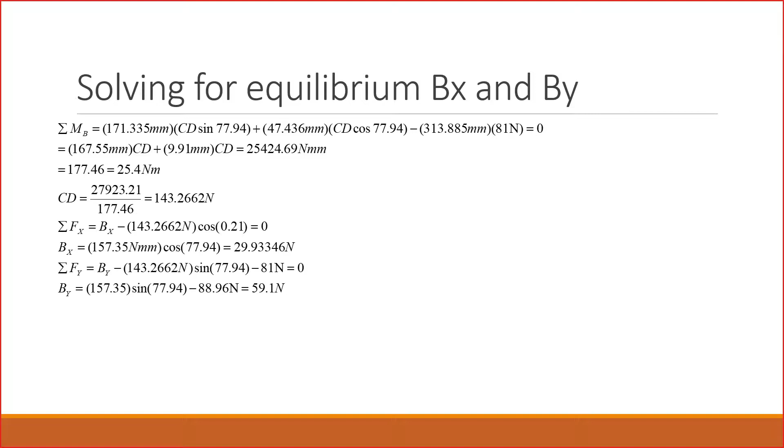So what I did just to build it up is I solved everything by equation to find equilibrium of where everything sits. Now I have provided these in the notes. I've just realised, there we go. I have provided these in the notes, and what I've then done is collated these into a table of results.

So within this table of results, what we're aiming to do is look for these calculated outputs and see if we're getting something similar to what's been provided by CD, for example. So in CD, you can see there—oh, you can't see there, that's very awkward. So let's look at BY and BX.

Now we can test for BY and BX just to see what level of force is there, because we've got the joint—that will pull out forces for us. There's many different ways we can do it, but these are key things that we can look for.

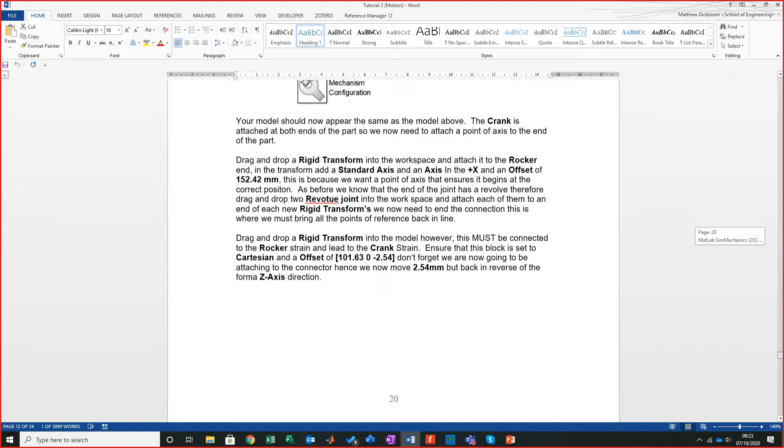And into second generation, so this is the second generation one. I'm going to work my way through this right now, but I'd like you guys to be aware of what it is that we're doing and what we're aiming to actually get out of all this. So what I'm going to do is just minimize the notes. I've also downloaded my bar linkage.

Now we need to tell Matlab that we're going to use a particular folder. So on my desktop I'm going to right click, then go new, and I'm just going to add bar linkage as a file tab. So under there I'm going to double click in, and this is now going to be my working folder. I need to keep this in mind.

I'm just going to close off all my Internet Explorer because I want to take you through the process of unzipping particular things. These are all my notes, so in downloads I've got bar linkage there. Now I put it in a zip because there is an automatic unzip profile built into Windows.

I do like to use 7-zip, it's a high compressor, it's really good. So what I'll do is double click into it, and then what I've got is the connector, the crank, the frame and the rocker.

And what I'm going to do is highlight them all. Do not think that you can double click that in and that's an accessible file, because that's you sitting inside of that compressed file. What we need to do is go into it and then drag across. I left click, drag and drop, and all that'll do is take a copy of what's in that folder and make it an accessible folder.

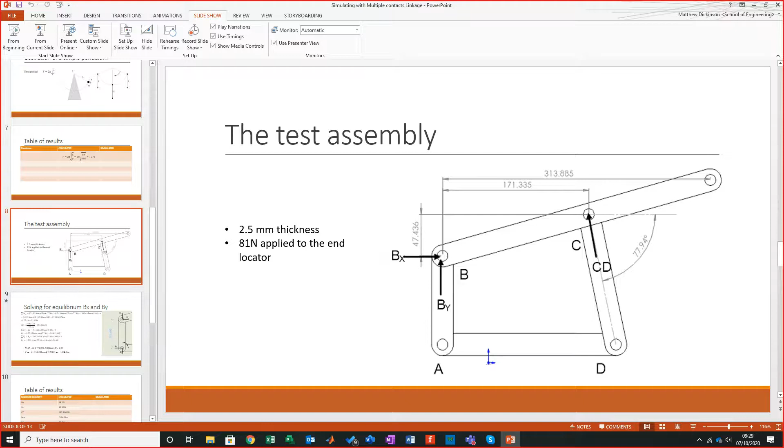One of the first things we always need to do is set up the key active components. In this case, it's the world. Wait a second, so I've just gone to library. I'm going to minimize there, and I'm going to drop my Simscape multibody, and these are the key points now that I'm going to be looking for.

So I'm going to go utilities. From utilities, I need a solver configuration. Don't forget the solver configuration allows me to modify the inputs. I can choose relative tolerances from what I'm getting. I'm presuming that Matlab know what they're doing in this case, so I'm not really modifying it. I just want it to be there to allow that solver configuration if changes need to occur.

I'm going to go utilities. I'm going to drag and drop a mechanism configuration. Finally, I need that all-important datum, the world datum, a starting point.

This is where our 0,0 marker will be, our 0 point for the components. Again, I always call it a datum because quite a few will be CAD savvy, so I call it a datum in this case. We've got frames and transforms. I'm going to bring in a world frame. So this is now my world. Just sounds silly to say.

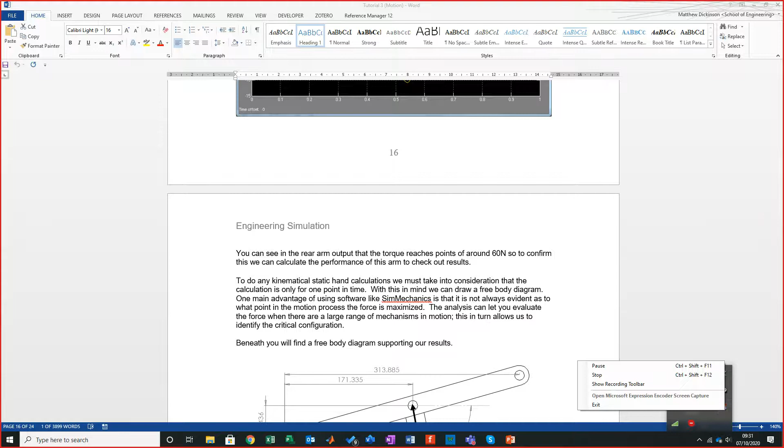Is this session recording, is it? Yeah, because normally you see a red border. Yep, this session's recording. Oh, do you normally see that red border on that? Yeah, I didn't realise you guys saw the red border, but the red border is here. Normally you see a little red button as well, in the corner, it just says it's recording. Just letting you know. Ah, hang on. Yeah, you mean from other lectures? Yeah. Yeah, I don't use Stream.

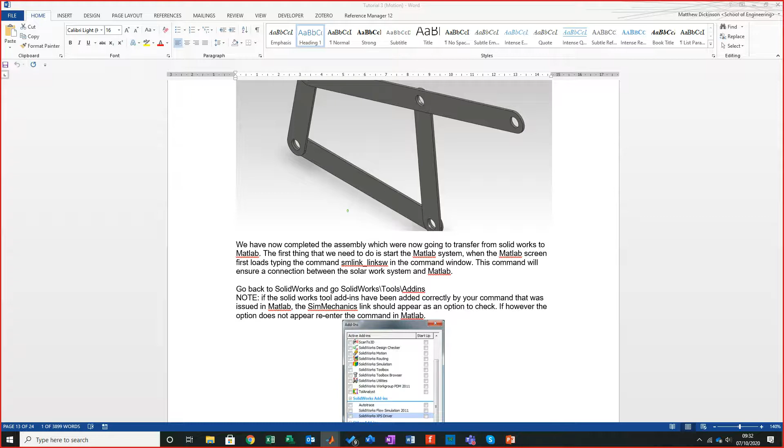So Microsoft Stream is an online method for recording, and if your internet signal goes a bit dodgy, it will record your screen going dodgy. So what I use is an on-screen mechanism called Microsoft Expression. What Microsoft Expression does is it records the screen to my hard drive, and then I upload the file. So if my signal goes bad, the video will be extremely consistent. That's the only reason I do it.

Right, so what was I looking for? Oh yes, right. So if I just bring it back up, right there. So we've got a baseline. We have a frame, we have the crank, we have the rocker, and we have the connector. What I've always approached with this first is the actual fixed points.

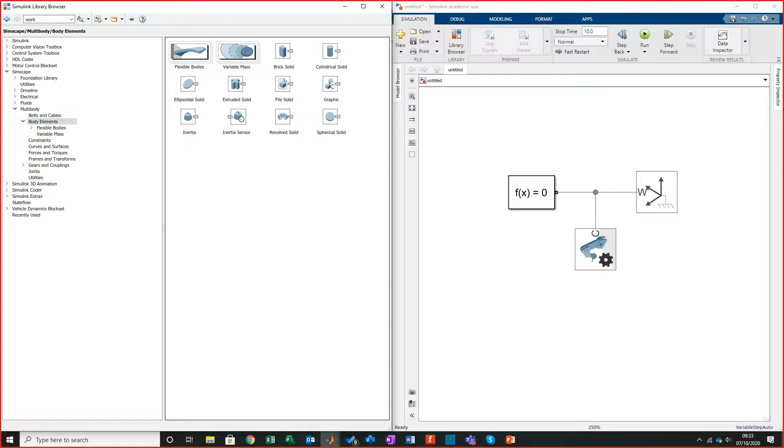So I'm going to go with the frame. If I come down, come in, and what I'll do is, first things first, I'm going to go to body, because the thing is, the frame in this example does not move at all. So what I'm going to do is say file solid, drag that over, I'm going to rename that and call that frame.

Then I'm going to rotate it, bring that up into place, and bring that down. And then all I'll do is connect the frame in.

Now we're going to add to this, but the thing is because the frame is fixed, there's nothing it does. So all I'll do is come in, and what the system does now is it says cannot make a visualization because there's nothing there. As ever, there isn't anything there.

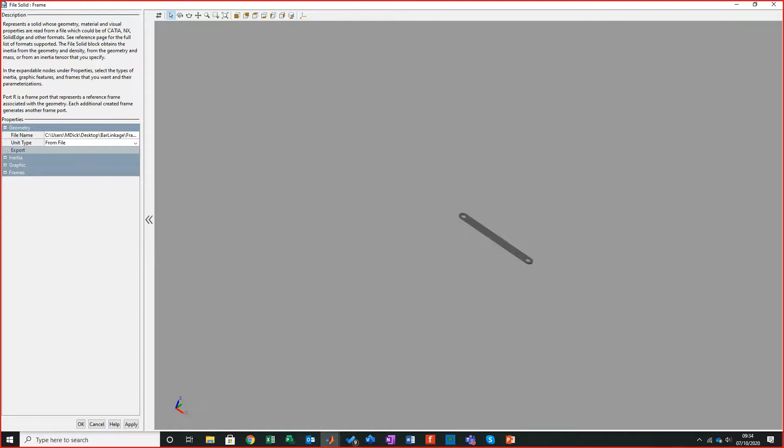What we're going to do is come down, and I'm going to go to my folder and go frame, then click open. And if I press F5, what I get now is my base frame component.

Now with my frame component set, this is quite useful. So what we see here, if I just expand this out, what you see is an address. It's on my C drive from the user, and it just tracks to where it is. Now if I move this file somewhere else, the location will change. If it changes, this will crash.

Now by using the live file, when I added the file at the beginning, what that means is I can use the active file. The only way I can do that is if I delete and just have frame.step. What that will do is, as long as I add that file location each time, it means it will always find it automatically. It's just a quicker way of being able to do it. It can be a little bit frustrating otherwise, because you can get caught up with all sorts and it's a pain in the backside.

Right, now the density. What I need is a relative density, and this is far from what I need. So what I'm going to go with is, I think it's a steel, so 7700. Is it steel or aluminium? I always get myself mixed up on that. So I'm going to 7700. This is going to be the same material I'm going to use for the entire thing as I am going through. So this is my output points here, this is my mass, my center, my moments of inertia, and everything's been pre-calculated for me, which is great in this case.

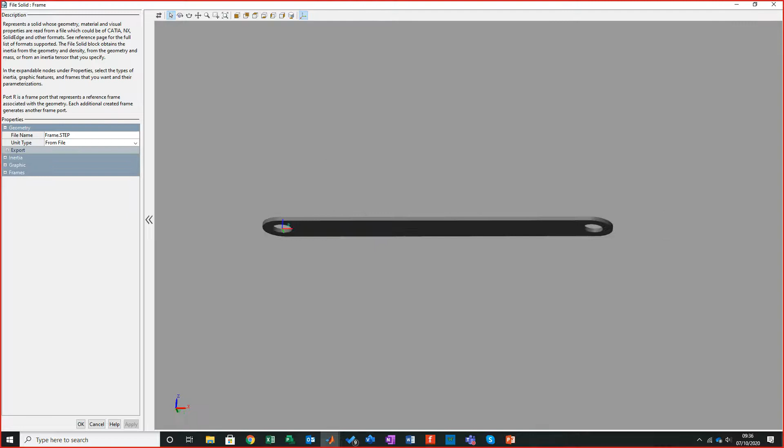Now this is where it's really important. If you zoom into your frame location, it tells you originally how this was drawn. So this was drawn from the datum on the circle and then extruded to give my 2.5mm offset. That's fine. So I give it to the 2.5mm offset, and then I've given that distance across. So what that tells me is if I'm doing any particulars, I need to be aware of these sizes.

So I'm just going to close that, and then I'm going to go into bringing in a rotation. Now this rotation is purely around, I'm calling up these notes as much as possible just to show you. If you look there, it rotates around this way. And what we need to make sure is that there's no collision, so what this will do is push things out. So first things first, let's just add these in and take a look.

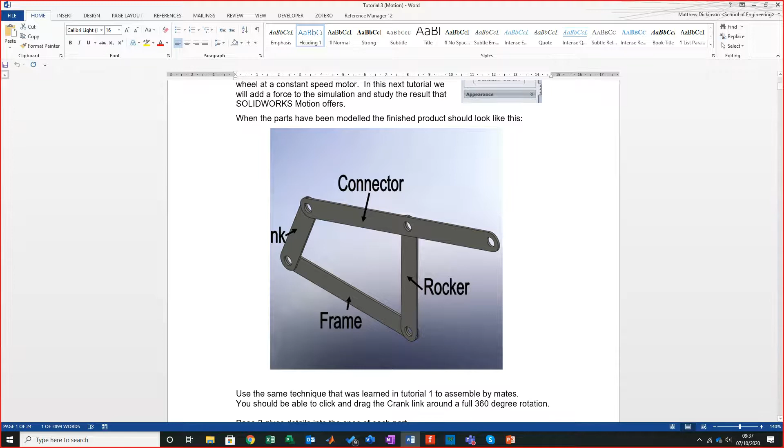Right, so if I'm doing that rotation around, I'm going to go to joints, revolute. Now the revolute, as you'd imagine, is a revolving joint, that's all it is. So I'm just going to bring it up to here, and I'm going to add a revolute joint in. Now, I don't like to waste time with a lot of things, so what I'll do is right-click on here.

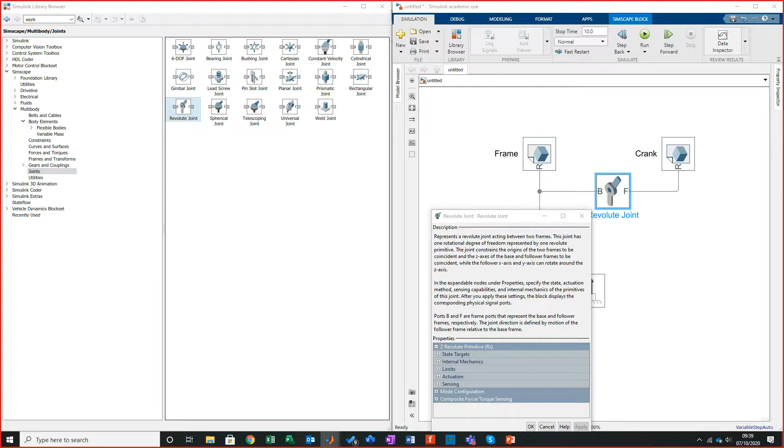So these two are now connected by a revolute. And what I want to do is just make sure that this thing's going to move. So I'm going to set a temporary speed and set it to 60 revs per second - this is an initial moment so it can be moving at that present rate. So from my target state, targets, from specific velocity target, I'm going to go priority, high desired priority, and set this to revolutions per second, and move this now to 60. Then this just sets this in there, and you'll find it matches with the notes as well.

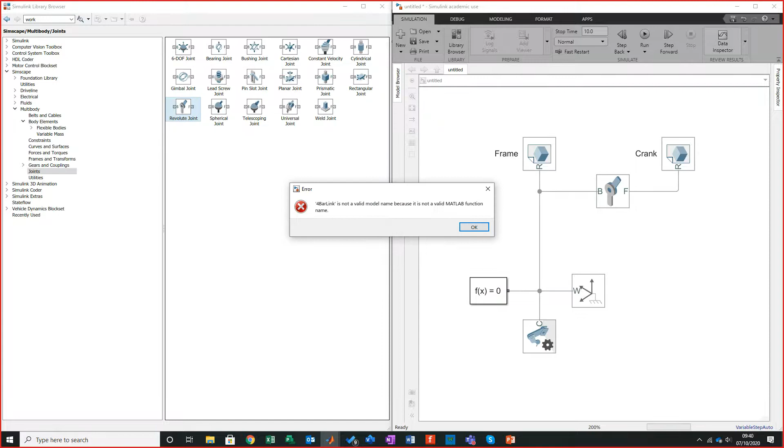If you've not done already, hit save, so I'm going to go save as, and I'll call this bar linkage, or 4 bar link. Save that. Oh, God, Bloody Matlab with its names. I'll just call it bar link.

There we go. So the reason I've done that is we're ready to just see this running. We're ready to start making small steps to be clear about exactly what it is that we're looking at.

Oh, this is a great question. Great question, I just want to pause for this one. I just want to read the start of this as well: this might be a really daft question, but what is a step file from SolidWorks and why do we change it to step? Good question.

So SolidWorks has its own particular way of dealing with translation, like an Inventor file - I think this was in the 80s. In the 80s, a lot of people came along and went, right, we do a CAD system, we do a CAD system, we do a CAD system. And they went, right, we need a universal way that everybody can talk to each other, we're sick of it. What they did then is introduce IGES, the international way of being able to communicate CAD across the files. What they then found is some CAD systems didn't take up the key aspects of this IGES, so when you actually exported it, it didn't capture everything that you'd done.

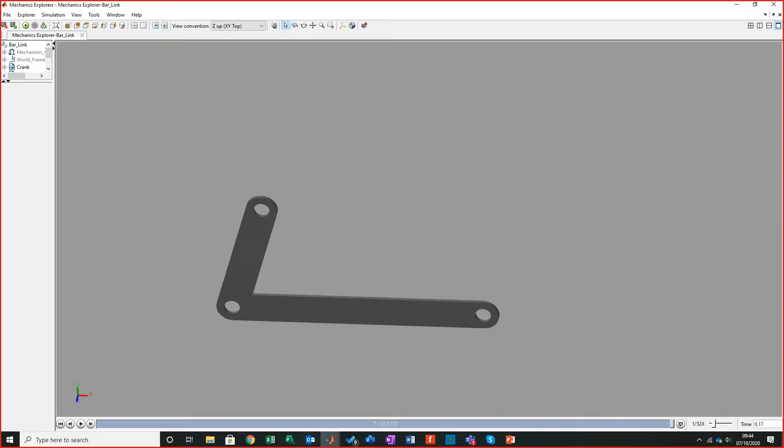Which is great, however, when we spin this up, we've got massive level of penetration. There is collision throughout the entire thing. This is good, it's moving like we wanted to. It is bad, it's in the wrong position, and it's not running like we wanted it to.

So this session today, what I really wanted to focus on is the use of rigid transforms. We did a bit of it last week, not much, just a bit, but we're going to use it quite aggressively today, and it's for that very reason.

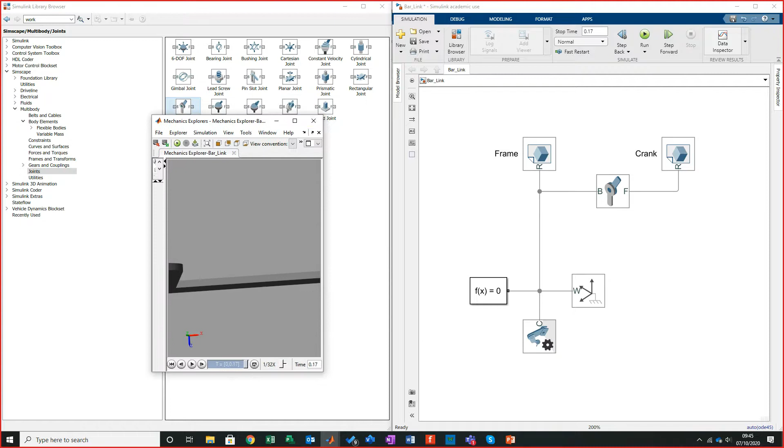So what I'm going to do is leave that open for the minute, I can close it when we're talking about it. What we know is that all-important 2.5mm distance has not been set correctly. What I now need to do is set it, using rigid transforms. Rigid transforms in this case can be set variably.

You can set... Matt, just to stop you. Yeah, go on Dave. You know when you're actually putting your assembly together, how come it didn't pick up that it was colliding with the other part? Ah yeah, good, this is a really good question, because this really does not know.

The thing of the matter is, if I just open these back up and look at this, what you'll see is all it's actually referring to - let me just update that - it's only referring to the physics of the actual component, it doesn't refer to the geometry. It didn't identify two components together, did it? Well it actually did, but it didn't identify them together. What you've actually got to do in this system is tell it that they're going to hit each other.

Okay, so that's when you head down the road of contact mechanics. But it's a phenomenally good question, because in this case, these two are presumed not to be. What this system will do is say, right, I will do whatever you want me to, but if you miss out stuff, I'm still going to produce it and you'll have just done it wrong. And it's clearly that, there are further things to add to this. I do really want to look - well, I'm going to see if we can do this, I do want to look.

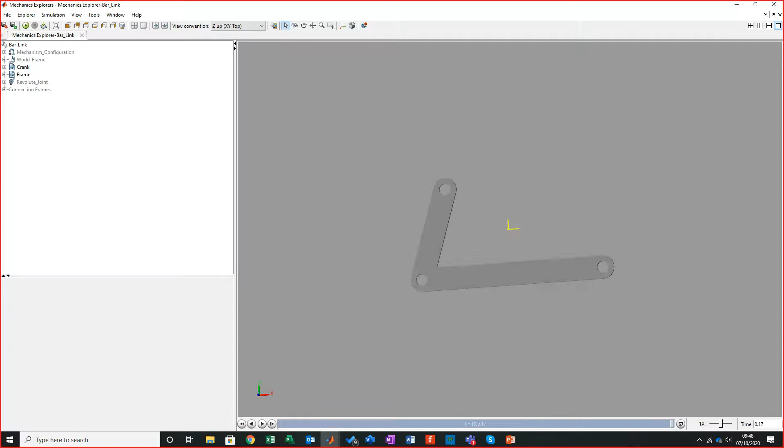Yeah, in this case the issue that we have is that it's just wrong, the way I've done this, it's just wrong. All I can actually do - let's say this has been brought in as a job - all I can do in this case now is work around the geometry and look at how this has been put together, and make sure it's a real representation of what's going on. Then once I've got that running, I can look at incorporating Archard's law to give me how much material has been lost as wear.

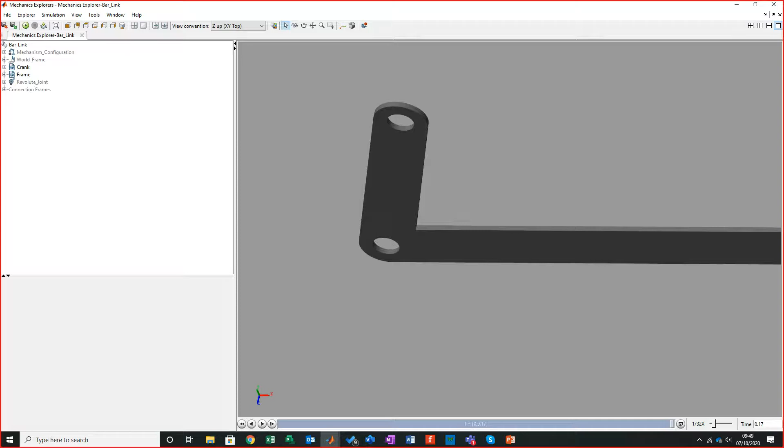Because Archard's law, to do with the two equations as they're running together, to do with the two materials as they're interfacing, I can calculate how much has been lost. And it's a dynamic input as well. But as far as the interfacing goes with the two, then I've got to bring in further things.

So I don't know if I've not got my toolbox on here. I have another toolbox I've been running, which is just contact mechanics. And I'm hoping in these sessions we're going to actually take a look at using contact mechanics. It's all right, it's all right to use. It's just a little bit intimidating sometimes.

Right, so what I need to do is I need to move these two separately. So I'm going to go to my rigid transform, bring in my rigid transform, drag and drop it, and push that into play. Now, the way that this works is the base is where we were originally. The follower is the result of what we're telling it to do. So whatever comprises past this point will be operational. Whatever is former to this point is the former position where we were sitting. So I can rotate this joint.

I can make the crank rotate in all different directions. I can translate the joint where I can say move in a particular area. So I can do standard axes, moving Z, moving X, moving Y. Now for this I'm just going to use Cartesian. Cartesian in this case is simply X, Y and Z. And I know that what's happened is it's not in the right position relative to Z.

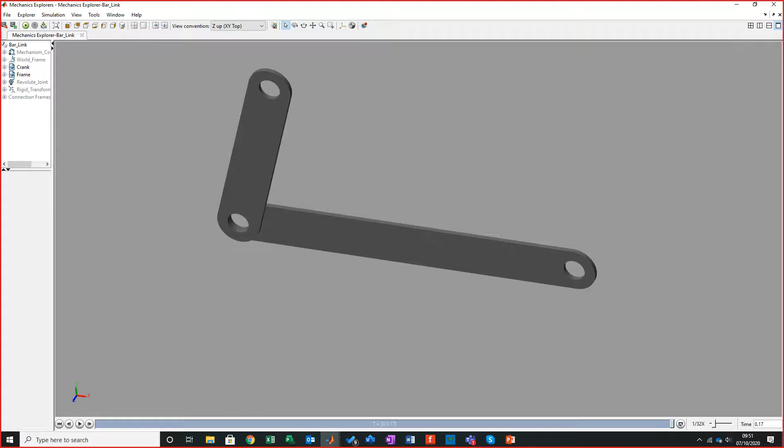I'll probably take this down by a factor of 10 as well. Actually, it's running, I only really need one rotation just to make sure that I'm operating. So I'll take that down by a factor of 10, I think that will give me just one. All I've done is take it to 0.017.

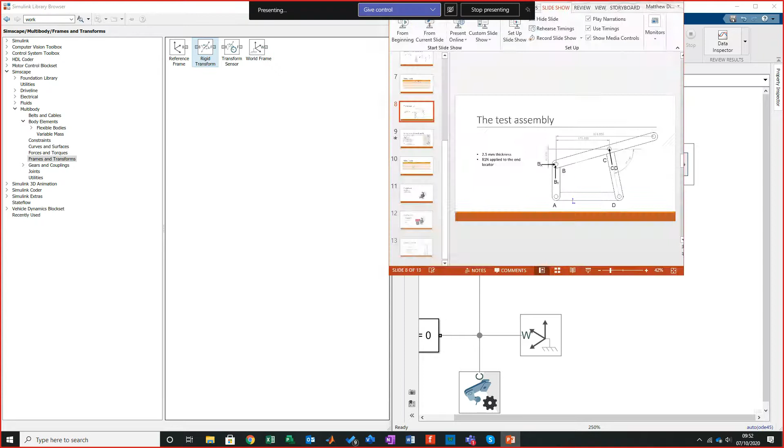Right, and ideally, now what I need to do is the exact same thing with the rocker. Now the rocker is the component to the front of it. The issue with this is again slightly different. The rocker now is at the end. So if I consider this, the rocker sits here, but I need to know what that distance is across from there. Now, again, I do like to just keep panning on these notes just so you can see. So the rocker is 152.4 between there and there.

So if I come back down, I'm going to go to my rigid transform, going to bring in my rigid transform. I'm going to bring in my rigid transform and pan it over here. I'm just going to bring this up a little bit, I just want a little bit more space, and this is now going to be towards my rocker.

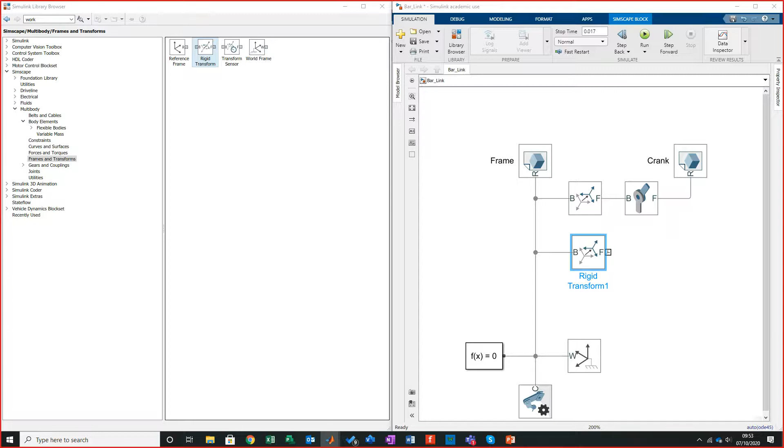Now the beauty is with this is I do know that my first Cartesian value needs to be that 2.54. It will need to be. But also I know that moving along that X component where the frame sits is that 203.2. Is it 200? I've got 203.2 in my notes. Why have I got that? Oh yes, because I was looking at, yes, apologies, yeah, 203.2, not, because that's the rocker. Yeah, it's the frame I'm actually operating to. Get myself confused now.

So what I now know is that in my rigid transform, I'm going to move this connecting point from on here, go to my Cartesian, and I'm going to delete that and go 203.2. We're going 2.54, and I'm just going to delete that out and then apply. Click OK. Now this is the same time.

You're in meters, not millimeters. Oh, thank God, thank you. That would have been very awkward. Yeah, you're right, that is monstrous. So I've gone millimeters, I have done it. I still do that to this day. Never get it right every time.

So what I'm going to do is, now I'm going to copy these, but don't forget this has been actuated, so I need to remove that actuation. So I'm going to highlight that, bring that down, and I am just really being that lazy. Just, if I can, I will do. So spin that round, and I'm just going to call that rocker.

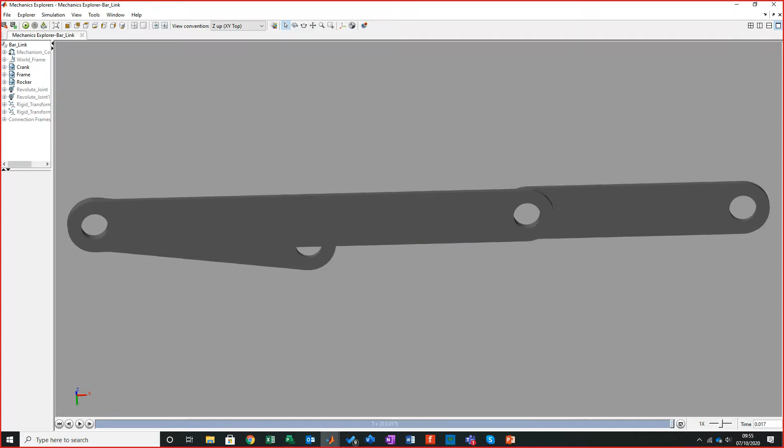Ah, I tell you what I didn't do. See the crank's there, I didn't actually add the rocker. So again, I'll come onto here. Because I'm operating from the active file, I can just type in rocker, click apply, F5.

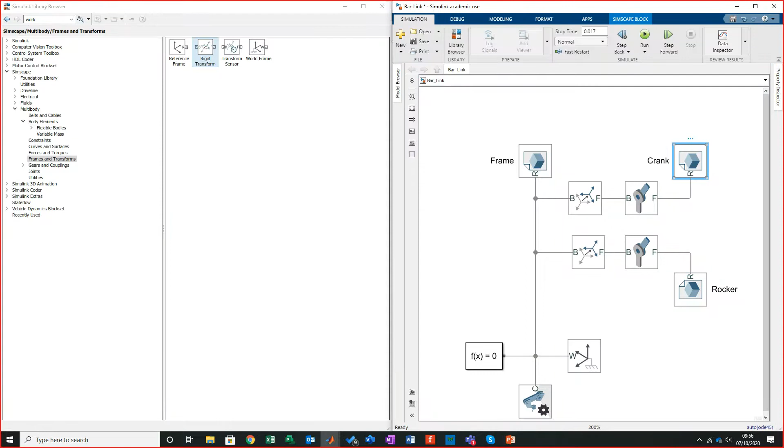Some of you may want to do this. I like to do this to just give me a bit of definition, because I think this comes back to Dave's comment as well, which is a good comment of, you can't really see it clearly. Some of you might be able to, not a problem, but I can't really see that clear definition between them. So all I normally do is go to graphics, and I will genuinely just colour one in a different colour, and it really does help when visualising what's going on. So I'll probably go here as well. I'm probably just going to change that to blue, and I know it seems a little bit over the top, but it is really useful.

I'll probably keep that colour, to be honest, and stay with that red, just for these two sub points, and then the up connector, I'll probably change that to blue.

But what it does is, if I run that, and then when we come back and we come to that - where's my component set now? So that's my X and Y. I'm just looking at the data, so I'm just trying to put it into something a bit more sensible. Right, there we go. So if I run that,

Slow it down a little bit. There's one thing that I've forgotten to do. I'm not trying to say I set it up, because I totally forgot to do it. I don't know if anybody spotted it, but there is one thing I've forgotten to do.

If I run that, this has perfect behaviour around the frictionless joint. If that is the case, why is it not falling? And the truth of it is I've forgotten to put gravity in Y.

So if I just quickly go to my mechanism configuration, drop out my 0 from my Z component, from my Y component, and swap them round, click apply, and now I should be in the gravity, and it should be moving them both. Let's just have a look.

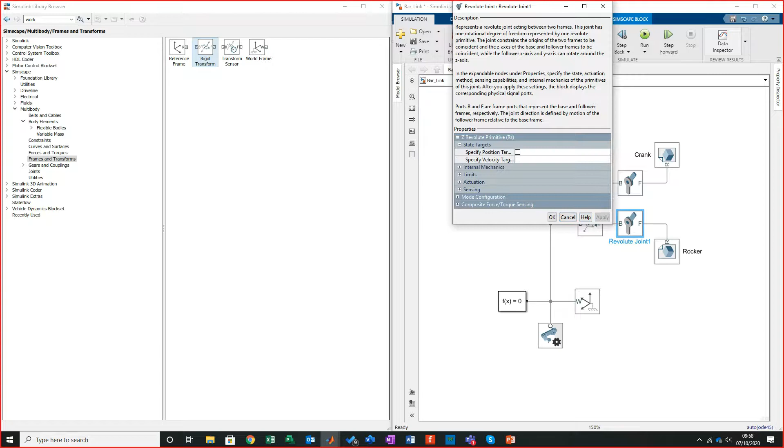I'm going to bring in the next joint because I'm not sure about that one. Looked at that, thought it could have given me more connections between it.

Right, what I'm going to do now is start bringing in the other component sets. Now, if you remember what I was saying on here is, bring that note in, enter there, right. So what I now need to think about is there is a revolute around here and also a revolute here. So all I'm doing is building exactly as this has been made.

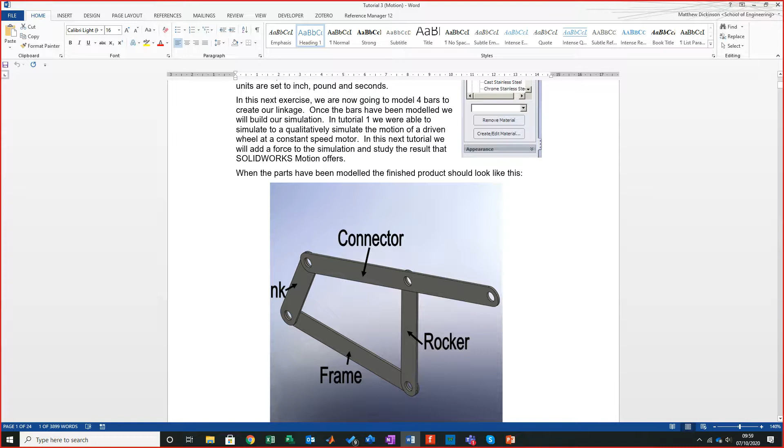Now the other thing about this is if you look at the frame, it goes an offset of 2.5 millimeters. Then it comes up to the connector, also offsets again by 2.5 millimeters. Again, all it's doing is just avoiding the collision. And all I'm doing is building around that collision. Well, I'm building as it's been designed.

Right, so I'm going to drag and drop a rigid transform, drop it into place just in front of it. And I presume some of you have already figured this out, but don't worry, I'm going to work my way through it anyway, so I'm going to go translation. Based on the notes, based on the values that we've been given, I'm going to come back, go on to

101. I should point out there is actually an even quicker way of achieving this, but understanding frames and getting used to moving geometry around like this is a real benefit. So you are going to see both.

This is the particular long way of doing it, but I am going to introduce you to both. This way really makes you get used to rigid transforms.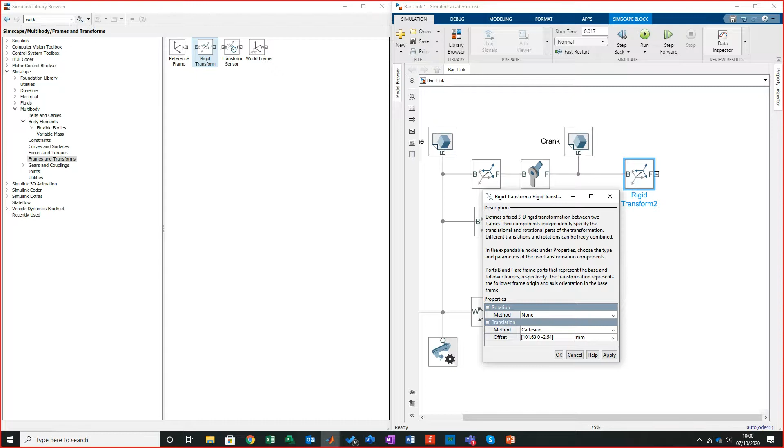So the 101.63 is based on that all-important crank position, and all I'm doing is putting a key point on there to where that sits, relative to the crank. The minus 2.54 again is just that offset of material. So if I click on there, click OK.

I'm just going to drag another one over there like that. Again, I right clicked and dragged it over. A student showed me that. It's been such a benefit, crazy what a benefit that's been. I'm a huge fan of it.

Right, so next what I'm going to do is bring that and copy that down, because all I'm doing now is connecting, making sure that the rocker and the crank have their all-important values in the right spot for me to operate with.

All I'm going to do here is push along, because I'm already sitting in that steady state. I'm only going to push along in the X component, I'll show you why in just a second. So if I come onto here and go translation, from my X component, standard axis, I'm going to push that by 152.42, which again is that all-important length between the rocker connecting point. Click apply.

And then we're nearly at the final point to actually test this thing running. So if I now run it, I just want to make sure everything's moving as I want it to. Oh, that is not good.

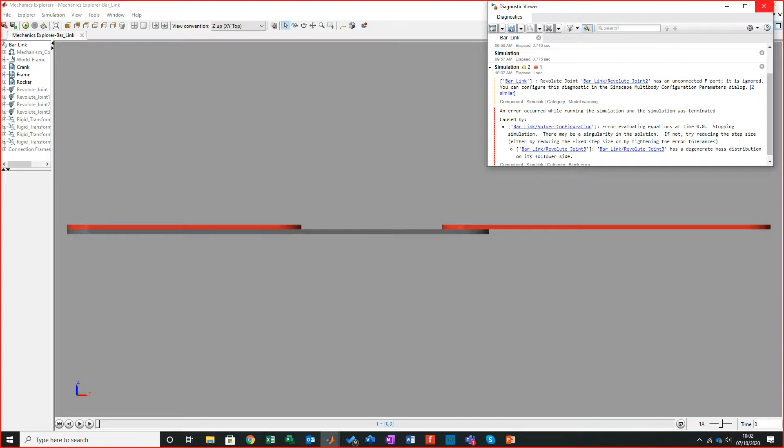Oh, this is because I've left an F port. What the system tends to do is say you can't do that, because it's like leaving a circuit open on any type of design. Leaving a circuit open is just daft. So that's what I've essentially done.

Right, so I want to see and make sure everything is connected like I want it to be. So let's start with the crank. You can see there that our connection points for this crank, we have rigid transform 2 - let me just have a look. So if I go rigid transform 2, you see our base connector comes here, we've got the follower connector sits here, and let's just check.

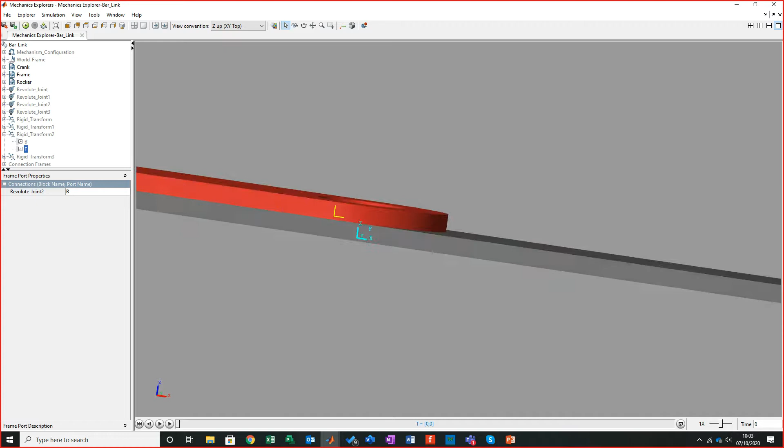Oh, look at that. That might not work out well. We've moved in the wrong direction. Bummer, bummer. So you look on there, what I'm actually doing here is bringing it home. This shouldn't be coming home, it should be moving on to the next plate. So this has gone in the wrong direction.

Let me just check on my rocker. Is my rocker the same way? I suspect it is. So if I go rigid transform 3, go base, follower, base, follower, base, follower.

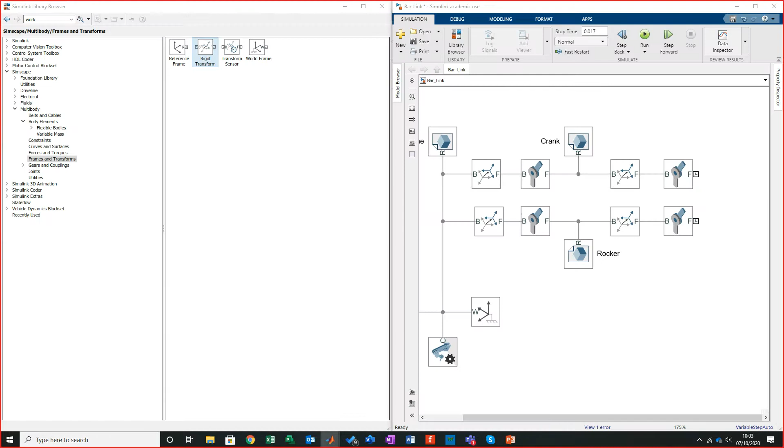So I could do with adding my 2.54 upwards. What I'm going to do is quickly jump back in, because I need to make sure that these are in the right position. So if I come back, go to my transforms here, I've got my negative. Just jump that out, click apply.

And if I come back onto here, because all I've done is just kept it open - this key here is update diagram. And if I go, because all I've done there is just edit my crank, so if I go back to my crank, this was rigid transform 2, go rigid transform 2.

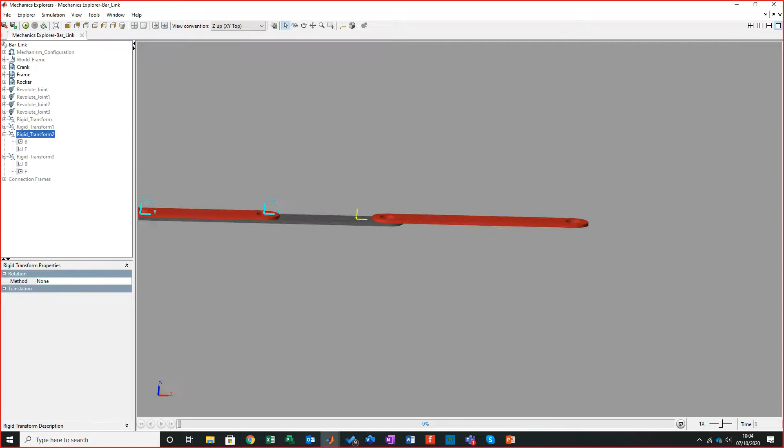Right, that's a little bit better. Now the reason I say that is our geometry - I'm presuming that the main connector was modelled like the rest. If it wasn't, then that's going to be problematic, we're going to have to fix it. But that's what I'm presuming.

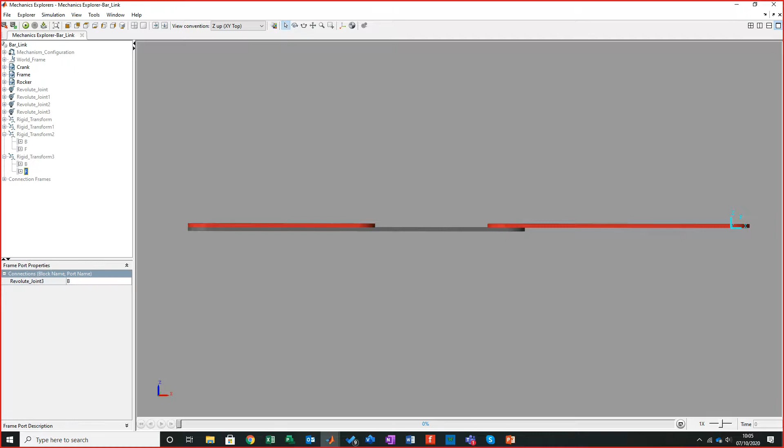I'm just sticking with the same mentality of what I've done before, where I've connected these two together. I'm trying to connect the connector here, but we'll see how well this is going to work. And what I need these to do is to sit in line - so the follower needs to sit in line here, up to here. So that tells me that this side also really needs a Cartesian to go 2.54.

So let's jump that in and go onto here, and let's bring that down and then take a look. I'm going to go on my millimeters, copy that out, and now I'm going to jump to my Cartesian.

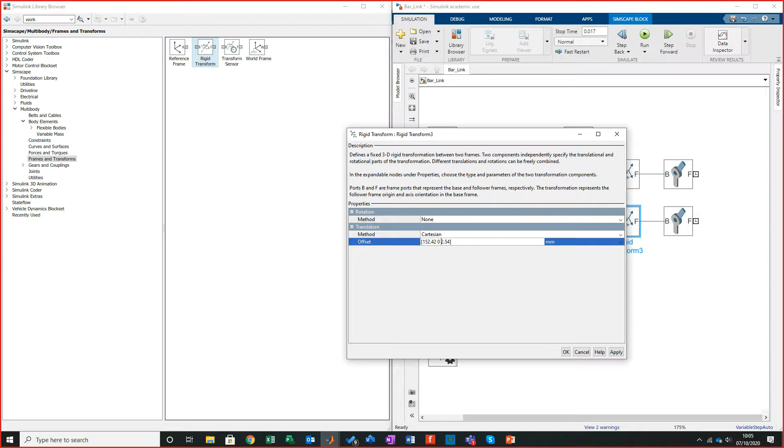Place that in, drop that to there. So if I come back, let's update the frame. Alright, so now these followers sit in their same space.

Now what's important with these is that they relate on the same point, because this system is very much a stickler for if something does not line up. If the system does not line up and somebody's done it wrong, you're screwed. You need to make sure that everything runs in correct line. When they refer to a frame, think of it as a component line setting. You can't have multiple things bent all over the place and just make it work.

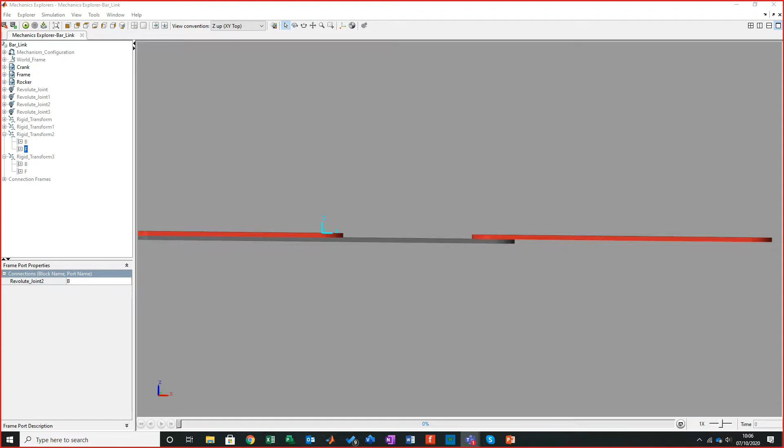Just for fun, I actually have an example of where something's been done so badly that it didn't work right. There was no fudge, but there needed to be a way to try and fix it. So I have a great example of this. Right, so let's just jump back on, let's come back out there.

Right, now this is the big moment. This is now connecting the two together, which is where there's lots of swearing that goes on, well, there has been with me over the years anyway. So I'm going to right click, bring this across, and this, I can't for the love of God remember what it's called, connector. So I'm going to go connector.

Spin this round, and I'm just going to put my connector, well it's the end part, almost the end part I should say, bring that connector to there, and before I forget, because I'll forget, I can't be bothered typing it, so I'm just going to put that in there like that, and then I'm going to delete out my address just to have connector, probably quicker just typing it. So I'm going to press F5, update that connector.

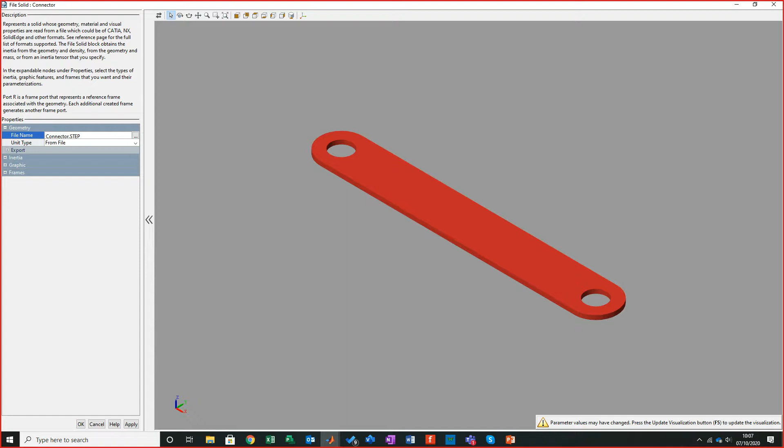So there's our key point for connection. Then what we're going to do is I'm going to just colour it. You can imagine in class last year we had some fascinating colours coming out of this, we had like pinks and God knows what. It turned into like a colouring in exercise. It's not really meant to be that, but whatever floats your boat.

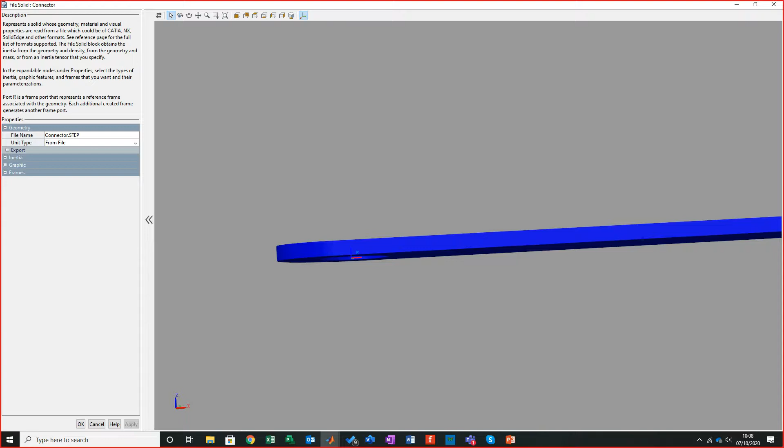If I just double click in again, there was one extra thing I needed to see. I need to see that toggle, that all important, how has this been drawn? You see there, we have one connector already there. Nice, this is good news, because that means if we've already got that connector there, what we can do is we can presume that that is going to work right.

So we're going to run this now and just see how it looks when it runs. Should be entertaining, believe me. So let's run it. Oh, what I'm just going to do is, if you run into these, because I've left this open, I'm just going to highlight these. If you want to just temporarily turn them off, I've highlighted them, right click on it, comment out, and all it does is temporarily turns them off, just so we can test our present configuration. Right, so that's what we're getting.

So let me bring that into something like that, and then let's slow that down. Let's just have a look. Perfect.

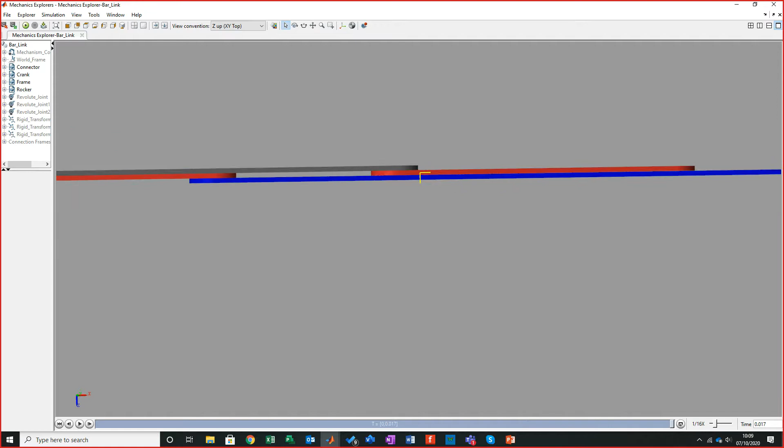I know it's not what you imagine, but it's a good start, because now what we need to do is just take a look around this assembly. Beauty is our components are not colliding, that was the all-important thing, that there was no collision going on. So that collision has been taken into consideration. I can offer more distance between it.

So for example, if you wanted to take into consideration a particular O-ring. Now with nitrile, because nitrile is hyperelastic, when you have nitrile, its ability to respond to aggressive scenarios like this is fascinating. What it can actually do is, as you stress the nitrile, it will stiffen in some points depending on the composition of that nitrile. If you have a very strange behavior between it, you can model it into that behavior, and it will give you a true output of genuinely what's going on.

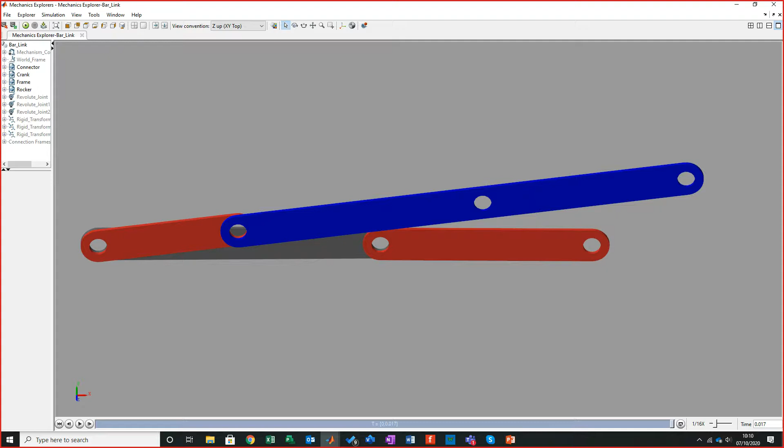Don't forget, we're not really considering the stress of the components, we're considering the work that's going on between it, and we're considering how well this thing actually runs when it runs. And we can also look at what happens if the components become rusted or damaged in some way. I say rusted a lot, it doesn't have to be rusted, it can be any type of operational damage it's suffered. So right, we've got that into place.

Next thing we need to do is we need to now figure out how in the hell we actually get this connected to this. Because if I go like that, if anybody's, well I presume a lot of you have really followed this, so if I run that, now because I've not given it a positional point here, if I click update, that's what it does.

Now that's happened because there is nothing to tell the system where that's meant to be. And that's all that is, it just doesn't know where it's meant to be. You kind of look and go, okay, yeah.

So we're going to have to take a little direction back. Let's take a look at the connector itself. So we've got 177.8. Okay, so if we go on 177.8 and then, so if I bring that back, bring that across to there, there's a few ways we could do it.

Obviously I'm going to stick with rigid transforms. The frustrating thing is when I show you the other tool, you're going to go, you've wasted my time. I've not wasted your time, don't worry. There's a few extra tools that I've not shown you, just because that will be cheating.

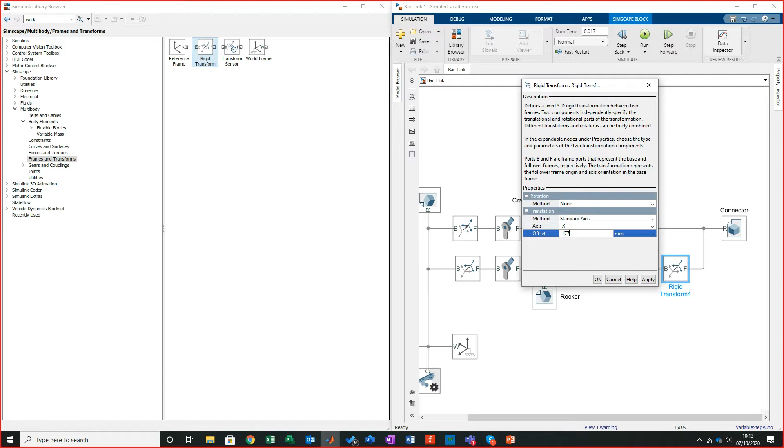And if I go minus, now I'm doing that minus, well you'll see in a second, I'm doing that minus because I'm trying to take into consideration where the components are meant to actually sit, where this joint's going to sit. So I'm going to go 177.8, and then click apply. Now let's just see how this looks.

So I come back to my joint, bring this back across, and that's my present joint. So if I do update, so I've moved, not the correct, I moved in the wrong direction. So let me just come back again.

Ah, what a silly sod. I was already in the negative, so I've actually gone positive. So if I go like this, click apply, then bring it back, so you see there, that's why it's gone poof, straight over there. I'll click that.

So we're now in a better position. Now what we need to do is the ultimate test of running it, because this might be a bit frickety at first. Happy days.

So let's just slow that down. I just want to be sure I'm getting something realistic here. Slow that down. We can put more speed in it, we can do all sorts with it, but that's got it.

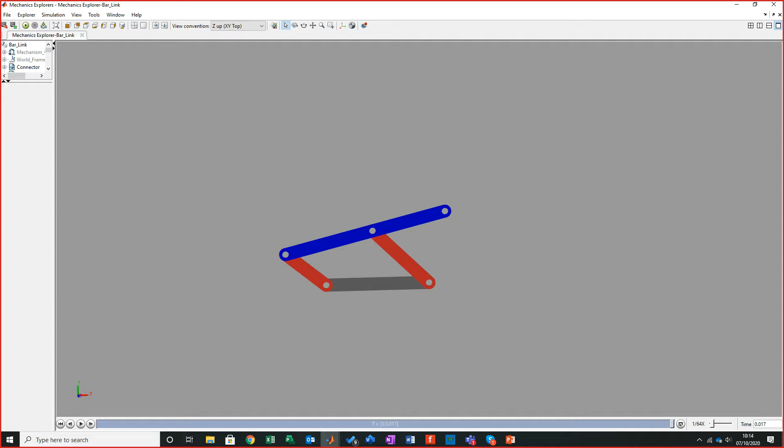Now, getting to that position is very tricky. We're now, as I say to everybody who's ever done simulation, please don't try and set up the most complicated simulation straight away, instantly, and just say, yeah, this is it. Does not work like that.

Ever work like that. You set up the bog standard, the real massive assumptions, and you get the baseline running. Get that baseline set up, make sure it's running like you want it to, and then once you think, yeah, okay, this is running, then move to phase 2. Your phase 2 in this case will be, let's drop on more complications. Let's see what happens when this thing gets messed up. Let's see what happens to the motor. There's lots of things we need to know with this first.

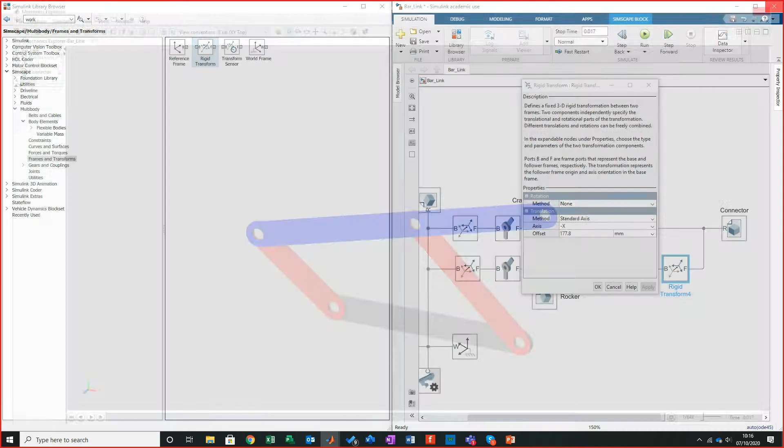But what we're going to do is we're going to look at the torque that's coming out of it. We're going to look at the passive forces that's coming on that CD, which in this case is over here. But the thing is, at the moment, we've still not applied that all-important force. Now, that's not something that I've really shown you how to do yet. What we're going to do, though, is stick it on there because it's fascinating. So let's just drop that out and click apply.

I think I've had a question. Let me just check.

I like to just check that, because for some reason everybody says Teams is amazing, but sometimes it just doesn't tell me everything that's going on.

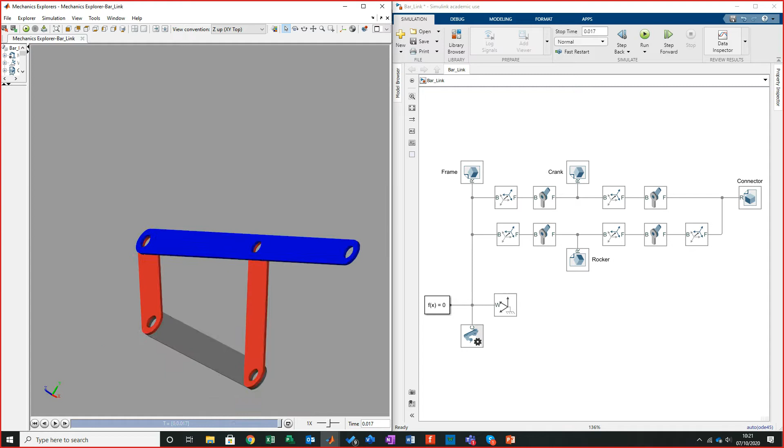So the last thing we've not done is we've not added the force onto it. What I think I'll do first though is start to pull out key value sets, key things that's going on about it. Let's pull out the torque that's occurring around the crank joints. So what I'd really like to know is that relation between here and here, so I want to know about CD. I'm going to bring in CD, and then from my CD I'm going to do some sensing. Let me just think.

Right, so what I'm going to do is bring onto here. I'm going to scroll that right down, and I'm going to go composite force/torque sensing. Then from there I'm going to go constraint torque. Now this is like we were talking about, Dave, about that constraint. Now this only refers to the relationship between them. Now the reason I put it on there, because let's face it, I'm going to mess it up, I'm going to do stuff to it to see what happens, because all we're doing now is we're just playing around with how badly this thing can respond under different things. So I'll put on my constraint torque.

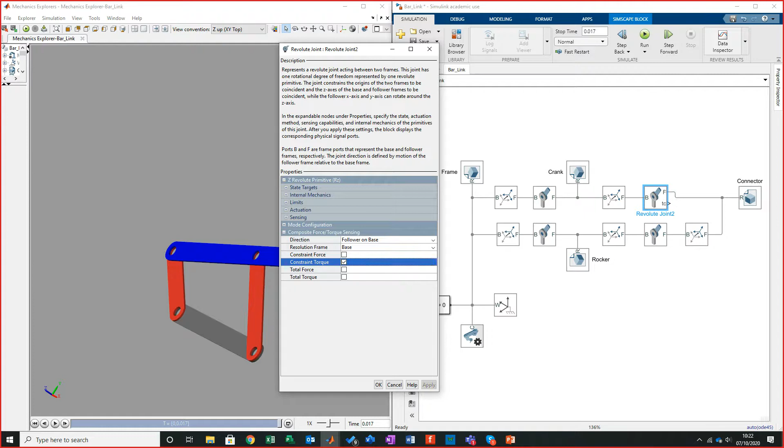Now you've got to remember at this point, it's very straightforward. It's going to be dead straightforward. There's not going to be much that comes out of it, because there's not anything that's really bothering it. But I want to set it up so that when I start to mess with it, it's still not doing any good.

If I go to utilities, I'm going to go to my PS-Simulink converter. And all I'm doing now is, don't forget, on Matlab it has the physical signal. The physical signal refers to a matrix of requirements, so the Cartesian values that are being recorded. So what I'm wanting to do is say, look, whatever you've got on these predefined values, drag them out, and I just want to see them. Now the total constraint is going to give me the total torque, it's going to give me the primary torque, and it's going to give me the secondary torque. So all I want to do is just pull out the first primary and secondary torques, and then I can start to mess with it.

Now if this does happen and you've got a grouping of outputs, let me show you. So I'll bring this in, and I'm going to go commonly used. I'm going to go scope and bring that out. Turn that around, bring it onto there. Now as this runs, this will be running unrestricted, totally unrestricted. So all I want to do is make sure that I'm getting something serious.

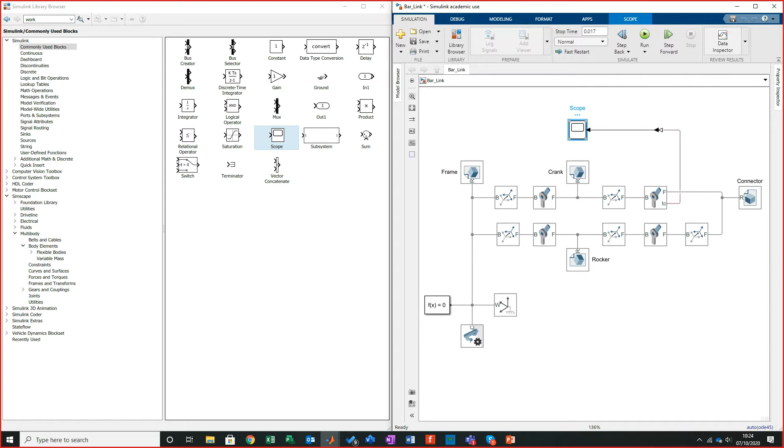So from here, because it's coming out as torque, as you can imagine, it's not going to be inherent, it's going to be Newton meter. And I'm going to run it. Oh my goodness, so if I run that round, this should be... I'm imagining I'm actually not going to get a lot from it, because again there's not a lot going on. So you can see here we've got our primary torque and we have our secondary torque.

Now it can be a bit confusing as to what the hell is which. So what I tend to use is a way to dissect these into two separate components so I can see them, because I look and go, is that primary, is that secondary, well which way am I looking? So what I like to do is bring this across, and I use what's called a demux. And this here is my demux, and what this demux will do is take whatever signal's coming in and then divide it down.

Now I know there is 3 coming in, on that output there was 3 there. So if I double click on there, I'm going to change that to 3. Bring this down just a tab like that, push that into there. Right, oh I didn't want to do that.

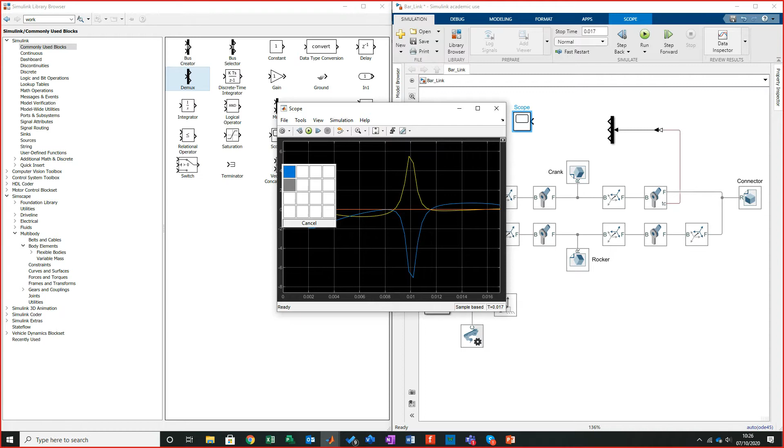So what I'll do is I'm just going to now focus on just my primary and my secondary torques. I can add these together quite easily, so I'm going to put on 2. So I'll go 2, and I'm going to go tabs onto there. 2, apply.

Onto there, bring that into there, and let's run it.

So we can see from this that we spiked to the highest of just under 6 Newton meters on a primary torque. And the secondary torque refers to the XY component, so if I add these together I'll get the overall torque of what's going on. But you can see here that it's pretty much an equal spread. On the secondary torque we end up with 7 Newton meters, but in the counter direction, just because of the component base we're talking about.

It doesn't really tell us much early on. The first thing I'd start to worry about is that it's a large climb. Given the material we're using and the output we've given it, it's quite a large climb. The moment to actually drive this isn't massive, but it is a heavy piece of kit. Don't forget, we're running steel, the whole thing's made of steel.

So you can imagine that running that is quite a heavy bit of kit. It might be worth pulling out maximum torque from here as well, just to know the type of output we'd need. Given that value, this could start to influence - I'm just pretending it's real, so it's not a real bit of kit.

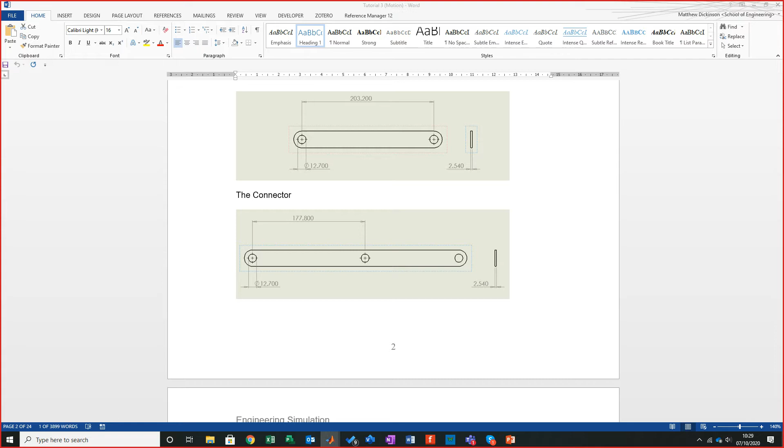Oh, we know, that's different, why is that not there? Oh, I've just realized that's not there. Should be equally spread - well, let's just see if that's equally spread, because that should be equally spread. I've run these notes for years and I've only just noticed that. That is awkward. So it should be equally spread, and we're saying 177.8.

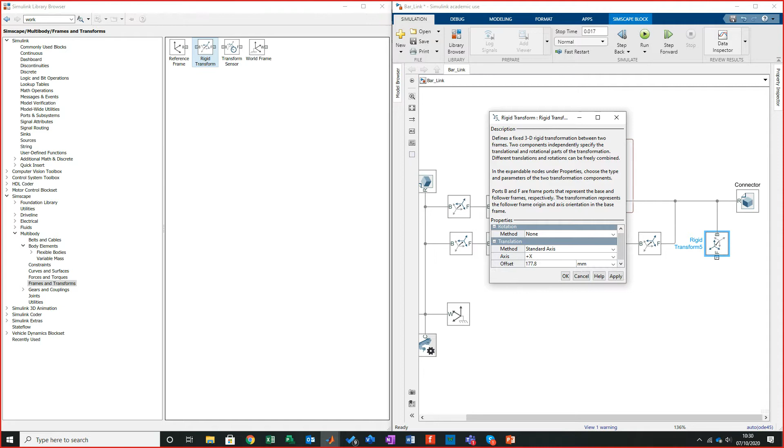And then what I'm going to do is go standard axis. I'm going to go, I think it's my positive X. And what I'm actually after here is just a point to add my loading to - this isn't to do with the simulation as much. So if I just update, it's going to have a panic because I've got an F statement on there.

So my rigid transform 5, let's just see where that Cartesian sits. So rigid transform 5. Base, follower, base, follower. Base, follower. Base, follower. Follower, base.

So this is now emerging because it's separate - it's no longer connected to these. So what this actually means is I've got to take the overall thing into consideration. And just because I've already done this - here's one I made earlier - what we're actually going to do is put in the full length of this, so I'll hang this from one of the edges.

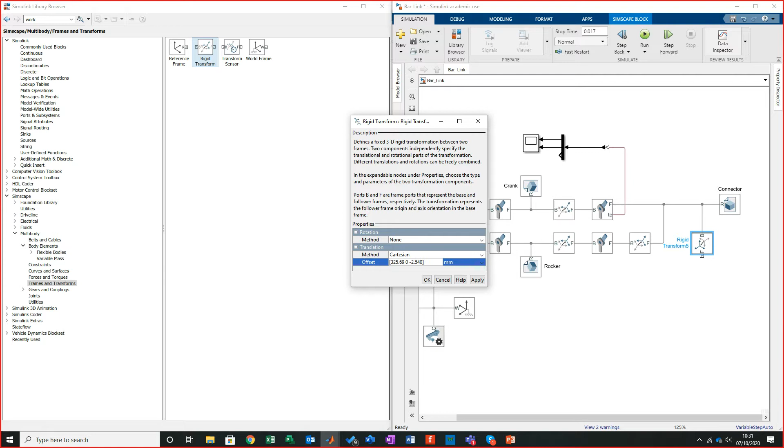And then all I'll do is just come back to my joint again, and I'm just going to update my frame, just make sure I'm moving in the right direction. There we go. Now, you see here - not the right spot, damn it. I'm going to have to go back again. Tell you, I can't fasten my own shoelaces today. That then really should be sitting on the positive 2.54.

And then let's come back and go update. There we go. And we've got that key point there.

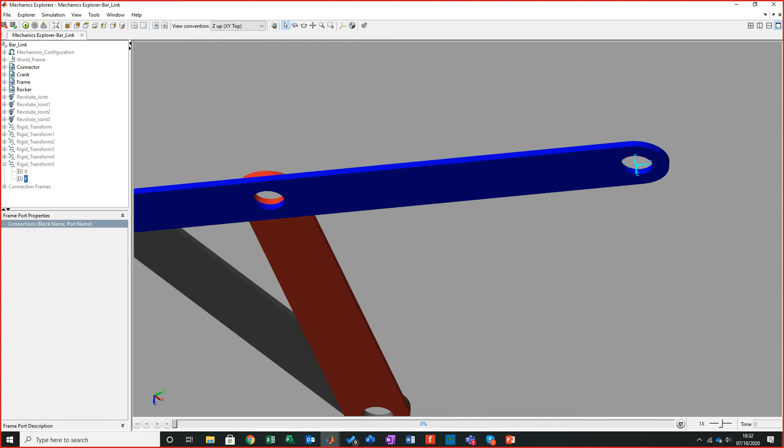Finally, I think - I'm kidding. Finally, we need to now add that force onto it, and then let's have a look at what's going on. Then I can start messing with the joints, and looking at damping around the joints. What happens if this joint has only this type of response? So let's come back in and go to forces, and I'm just going to add an external force.

This is the last stage, and then we've got that set up. So under my external forces, I'm going to bring that back down, and go force, and now I've got my key components here. Now this is a great bit of kit, is this one. I can just add external forces to something.

You've got to be realistic. You can't just apply it to something that's totally flat. It's got to understand what it's doing. If it doesn't understand it, it'll just go, you're an idiot. That's good, that is not working.

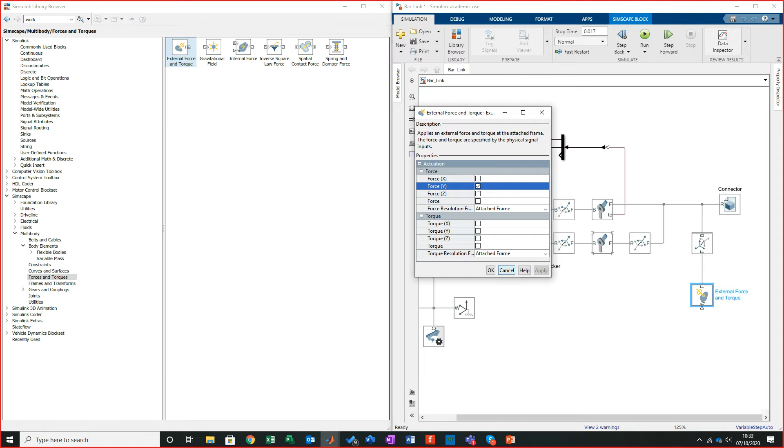So what I'm going to do is put it in the Y, because if you remember, we've been operating that Y component. So I'm going Y, click apply. Now by clicking apply, you'll see that it brings this in. This is purely because it's now saying you've defined that you're going to be putting things into Y, but what is the value that you're going to add?

Now in this case, what I want to do is just bring in a Simulink-PS converter. So this time what I'm doing is taking a single value and passing it into that matrix, and because it's already been defined as Y, it knows to make that Cartesian Y component accessible. So it's great, it really is.

So if I then go from Simulink-PS converter, bring that over, tag that in, and then go to commonly used blocks, because now I can just add my force. And what I'll do is go constant. Not quite done yet, but we're going to go constant.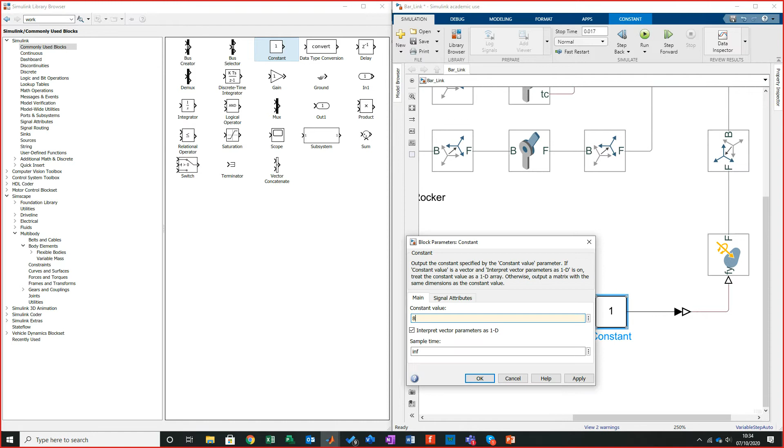And I think it was 81 newtons. And then I'm going to come into this tab. First thing it says, you've got an input value, I'll give you a unit of 1. So this becomes dimensionless - not what I'm after. I'm after Newton input, because that's what we said.

From here it then says filtering and derivatives - how do you want to provide it? I'm actually going to say just keep everything constant. It's just this value I want, don't give me anything sophisticated, don't give me anything - just keep it as a piecewise constant, which is just saying this is 81. Use that on this example. Then I click OK.

And we should now be able to operate this as a component set. So let's run it again. Right, and that... talk about anticlimactic, and that's what we get.

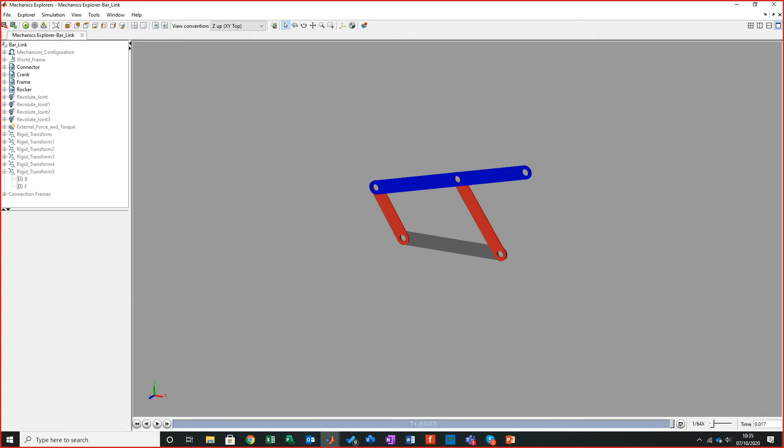So what we know now is based on the follower, the force is hanging down and it's continuously active within it, and it's acting relative to gravity. And it's acting for that Y component set. So now, if we come back to torque...

We notice that there's a few changes with it. Not much, but it's being dragged further, so the momentum drive for it, it is slower in its response. These spikes I don't like. See these spikes? That spike there would suggest that there isn't enough time for it to be properly calculated.

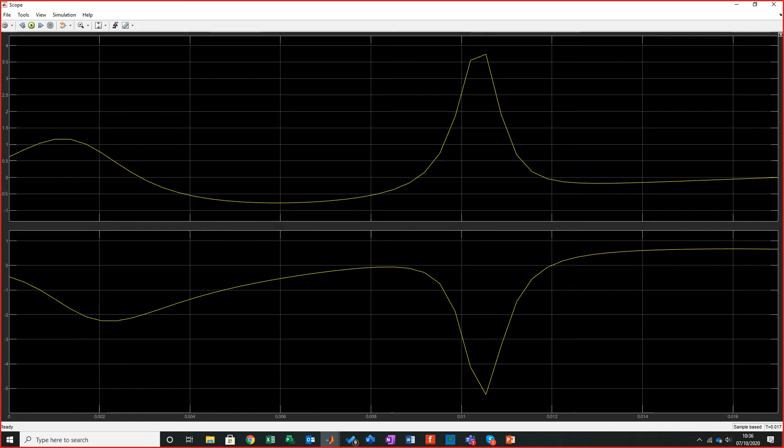If I look and see something like that, personally I will always come back out and go, right, what I need to do is just tidy that up to give me something realistic. So if I go to model settings, all I'm going to do is add a little bit more time on this to solve. So it's on 3, and I normally just bump that up to 1 to the minus 5, just to give it that little bit more of an angle. And then if I run it again, we've still got these large spikes, but it is starting to change ever so slightly.

I probably would go back again and look at tightening up that tolerance even more to make it as smooth as humanly possible. Right, so based on the initial values we're particularly getting...

Initial calculation for MA was roughly 3 Newton meters. So it's still needing some fine tuning, because MA in this case sits... I've actually not noted MA for this case. I don't realize how poorly that's actually been noted.

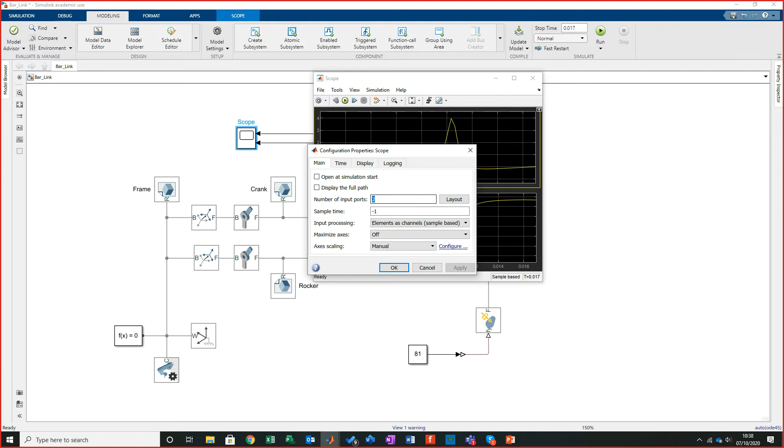And if I now try to look at my total torque, because I do want to see this total torque, let me come back on and add a third one onto here, and add a third layout on that.

There's something really useful here, so what I'll do is just tap sum. This tool is literally as it sounds. So what I can do with this is just say sum this and sum this, and then feed that in. Oh, I don't like that, it's very messy. Feed that in.

And if we run again, it's more like it, so we have our total out there. So if you look between here and here, it's just beneath 3 Newton meters that it comes out at. So well, it's actually negative, so just to show you, it is still a little bit out, but it's much closer than what was particularly imagined.

Now, because I've done that, and because it shows that I am on the right road to getting the correct value, now what I can do is mess with it. Now I'm in a position where I've verified that my values are somewhat close to what I needed them to be. But now what I can do is move to the next phase of saying, right, what happens? What happens if?

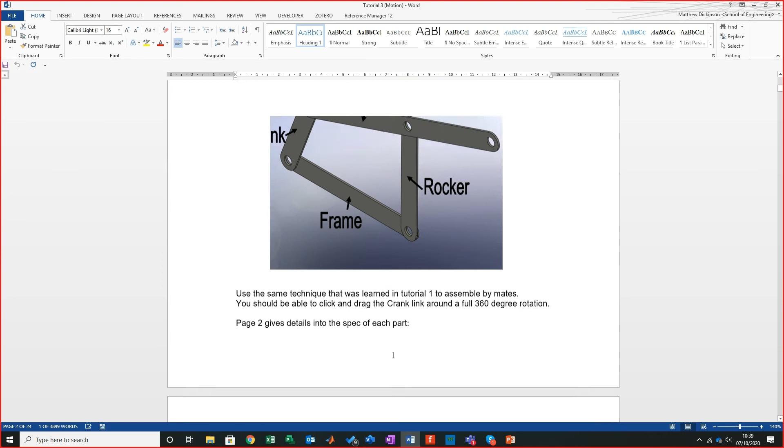So let's just take a look at the actual assembly. Let's say, for argument's sake, something gets caught in the top here, and it restricts it, stops it from being able to move as nicely. Now something with a damping around a joint of something like 1 will be totally fused together and 100% broken down. Now the joint I'm referring to here actually is this joint, so that's what we're actually looking at.

I can pull the full output out from here, but if I go onto here and say, right, what if this joint does become partly damaged? Now something like a journal bearing, you'd end up with 10 to the minus 9 Newton meters degrees in damping, so this will be something like 0.12245, probably a couple more, but that would be starting to give us some type of off-the-shelf bearing.

So if I run that and look at it, you see there, not much has changed. However, what if something gets caught in it? What if that journal bearing's ability starts to seize up, it's not been lubricated? What type is that going to give?

Right, so if I then run this, and come back again and run it, what we're starting to get is drastic. We're starting to get a build in these changes. But if I go quite daft and just really presume that it's suffered quite a bit and then apply, what happens now is the motor's driving from here, it struggles to actually actuate it, and then we end up with, wow, there's not much really changing on that.

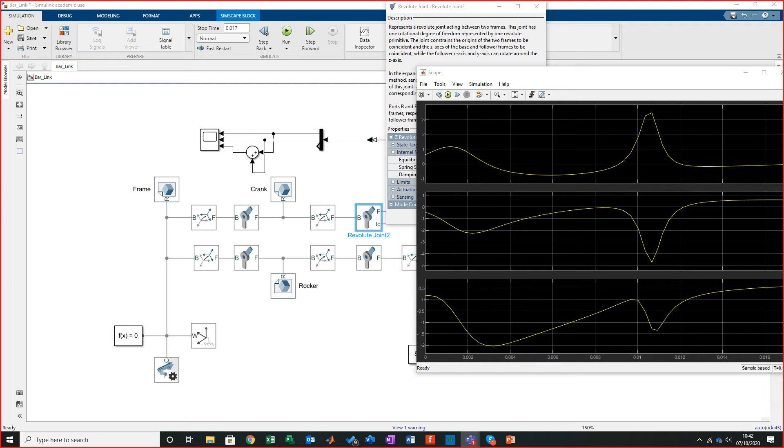Now you'll notice here that it's not really changed as of much, so that prompts you to think, well, what if we look at the output of the actual joint itself? So if we go back to the revolute joint, and we go - I can go total torque, but I like to go on constraint torque of just what's going on around it. So what I'll do is drop that out, and then I'll now take a look at this joint.

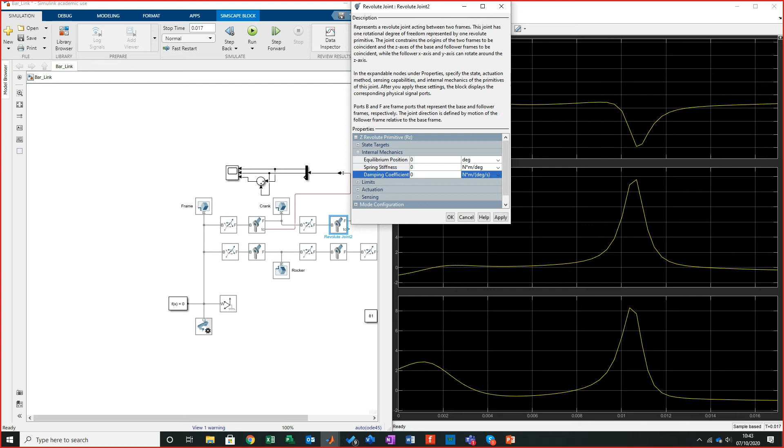So that's my output. If I come back out and come back to here, I'm going to just drop that to 0. Is there a big impact on the system running when it's like that?

There's a slight change within these momentums for their outputs. A slight change. But what if the motor starts to struggle? Now the reason I'm doing this is if I just go daft, 0.1 on a damping coefficient, actually on the entire thing, and I run that, so that is what will be the motor exploding.

I say exploding, failing. Now if the motor gets to that point, what actually happens? The reason I do this - what actually happens is the motor will seize. As it starts to seize, that power is still being provided to the actual motor. Due to some of the electronics on board, it's great, but that work needs to go somewhere.

When that work does not go somewhere, what it will then do is start to heat up the coils. As the coils start to heat up, you will start to get large levels of temperatures burning. Some of you will have felt this in little tiny stepper motors - if you overload them, you'll find that they're red hot, burning hot. As it starts to happen, these will then burst into flames, and you'll get total failure, absolute total failure.

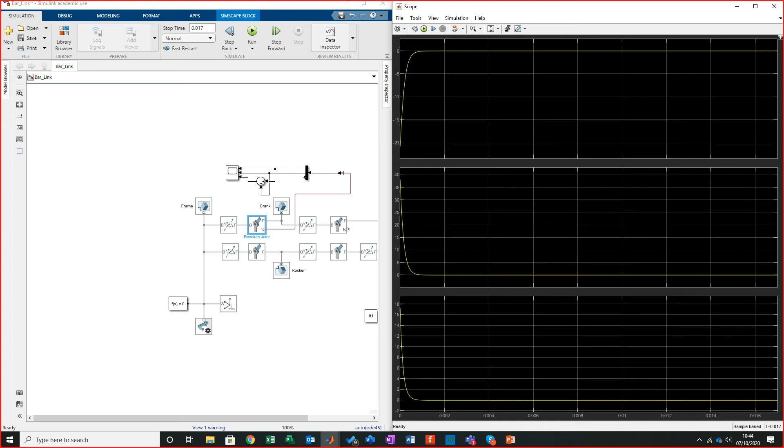Now that's obviously a massive exaggeration as to what you get. Let's bring it down to something a little more or less. When you actually look at something like that, which is not that crazy, but at these states now, yeah, it is quite. So if I make this a little bit more...

So you see there, what actually starts to happen is its ability for the torque to put out drops drastically. As that ability is dropping, you can presume the ability to actually create the system to get into full momentum - that work has to go somewhere.

So what you could do as a point of protocol is, if the system starts to drop its torque to a particular level, you can move to investigation, you can move to the next phase of that investigation. I mean, that's just me playing around with the torque output.

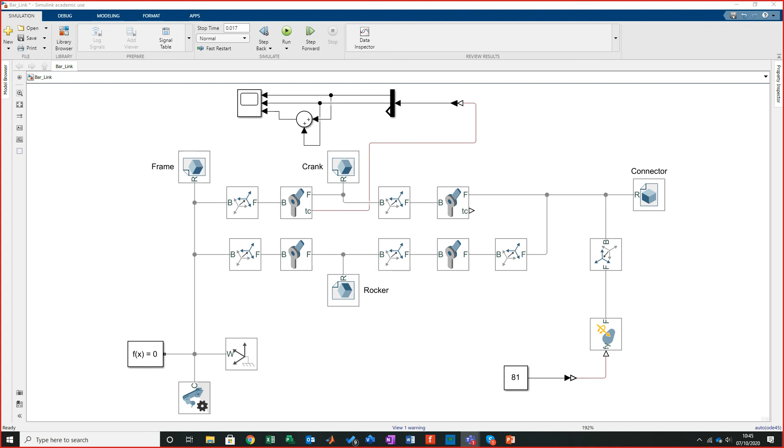I verified completely against what I've been doing, so it gives me a good solid position of that. If I go into my employer, to the boss or whatever, I can actually go in and say, look, when I started this as a sim, I was clear about what I was actually getting, so I knew what I was actually producing, and now I can actually hang things, I can look at responses to it.

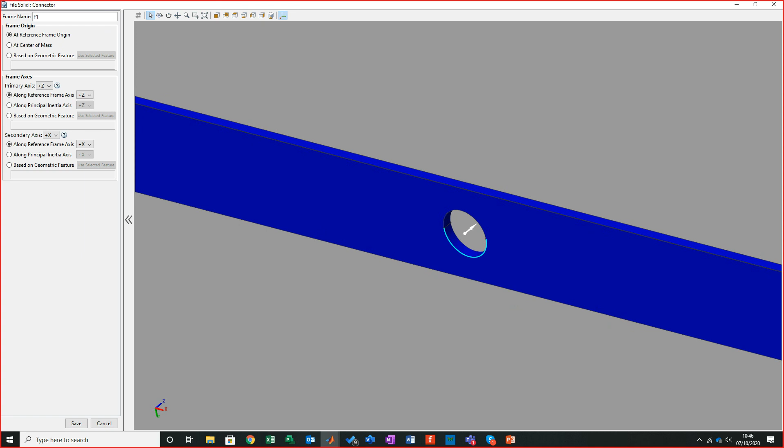So we put on rigid transforms, we got used to putting on rigid transforms. I can click frames, and on here, if I click onto toggle, I can go, well, I want to add a frame, and if I click on that edge, I go, oh yeah, use that as a reference. Click select, and then save, and then what you see is it's a way to add a connecting point. So if I click apply and close, what you'll see now is I've got another point to add to.

What I'll also do is I'm going to start releasing extra notes that I have recorded before, just for your information. I've done a few on gearboxes, a few on different ones, and it will allow you to really start to stretch in the different areas that you know about. Because there is so much in this tool section - this is just the basic fundamentals of getting it working. Past here it gets huge, there's so much in depth, it's unbelievable.